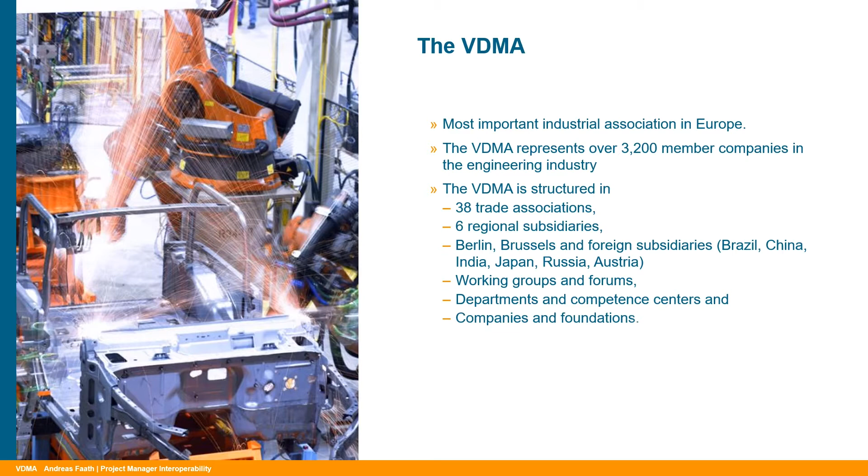Also between different branches inside mechanical engineering. Of course, we're working worldwide, so we have a bureau, an office in Brazil, we have China, we have Japan, so we are spread and representing the European markets, but also the world market everywhere internationally. So, to put it in a nutshell, the VDMA is representing the broad manufacturing industry under one umbrella.

And the mechanical engineering industry was forcing the VDMA to go for interoperability, for standards in interfaces. Because the problem we all have to face is that different interfaces are really hard to develop. It's not efficient to do different interfaces for different users and also for the different machines again and again.

So what we were looking for is a technology, an architecture, something like that, which is secure and which serves as the basis for an interoperable companion specification communication between different machines, with one language and with a kind of self-describing possibility of the machine itself.

So what we are doing really is the OPC companion specification development. That means we are not developing OPC as a technology or going deep into this technology for protocols and so on. We are really taking the technology OPC and bringing the OPC companion specification on top of that.

That means this is kind of a remote control, a universal remote control. So what you can compare is this universal remote control where we have 0 to 9, on, off, next, and reverse and something like that.

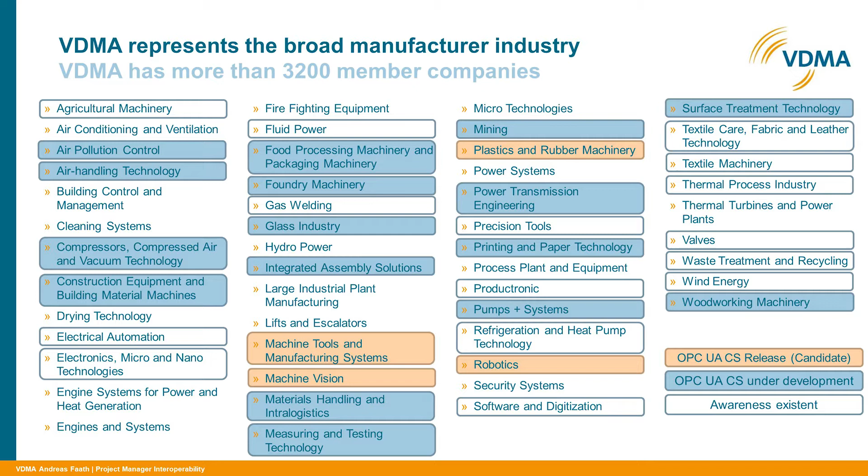What you can see here is the structure of the VDMA, and colored in blue you see all the groups which have right now companion specifications under development, and in orange you can see those who have a release or a release candidate. So what you see is that a lot of our trade associations representing the different branches are right now in the development phase of OPC companion specifications.

I will deep dive a little bit into some of them, and I cannot explain all of them, but maybe — I heard food processing machinery and packaging machinery is pretty important for the local market here.

So here the group of the Weihenstephaner Standard, maybe you heard of that, is translating exactly this existing Weihenstephaner Standard into OPC, so that the information which is standardized in this Weihenstephaner Standard is put into OPC and can be used in this technology as a companion specification.

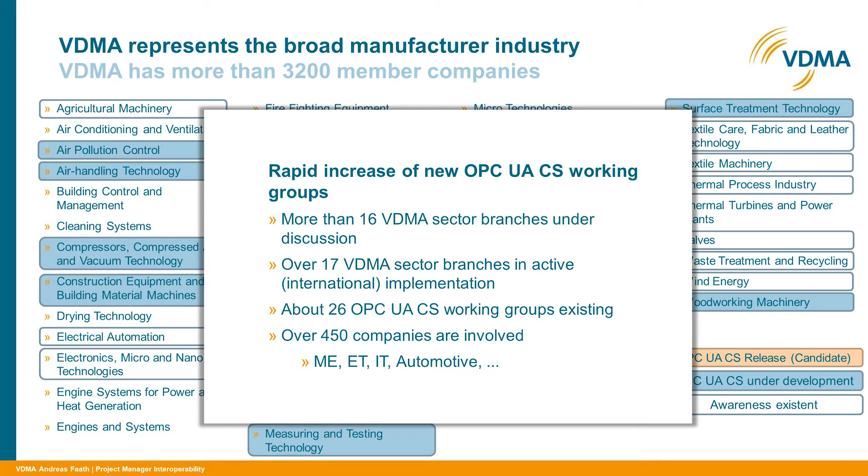Right now we have over 17 sector branches which are developing OPC companion specifications, and we have over 26 working groups. That means it's not like one sector branch has one working group — some of the branches have 2, 3, 4, 5, or even 6 working groups running in parallel or sequentially. And right now there are more than 450 companies really actively working with us in those companion specification working groups. This is really a big impact.

And this is why we have the VDMA really taken as an umbrella, a neutral ground, to bring the companies together, to let them talk about their interfaces, and to see what can be standardized and what is not that market-relevant, so that you don't have to keep it only to your own company, but share it in the group.

Those companion specifications, of course, don't fall from heaven. That means we've got a process. This process has 5 bigger parts and 2, I would say, ongoing parts in parallel. And I will explain this process using the example of the robotic working group.

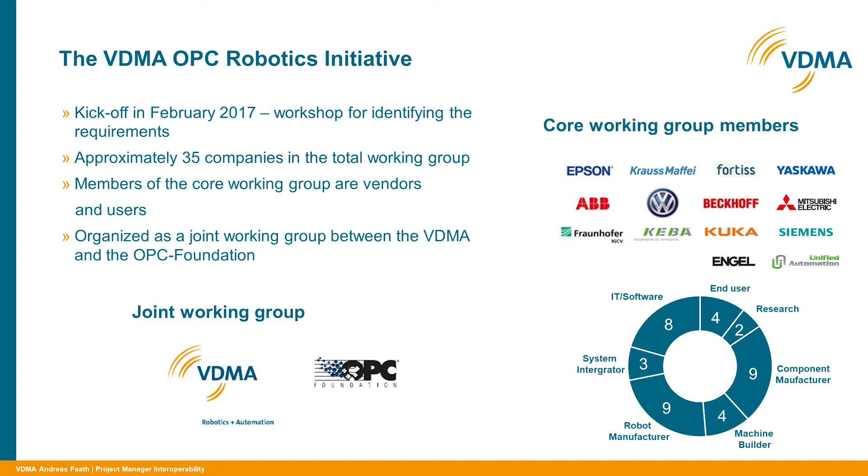So at first you see the preliminary work. That means our groups have a kickoff, they are starting, they are checking what is the need, is there a need, are there customers or users that should be integrated, and so on. So in this group, as you can see, these are the core working group members. You see here VW, for example, as one of the big users.

And as Stefan mentioned, it's also a joint working group. So in this group, of course, the domain knowledge comes from the domain experts, but a lot of OPC expertise is also coming from the OPC Foundation, and we are working closely together here.

For the content work, it's pretty important that the group thinks about their product, their machine type, and whether there's a possibility to do some abstraction. If I look in your faces, all of you have a different robot in mind. Some have 2, 3, 4, maybe 6 axes. So it's not worth doing a companion specification for one precise, detailed robot with maybe 6 axes, and maybe it's also orange. It's really important to get one abstraction level above that and think about what we all have in common.

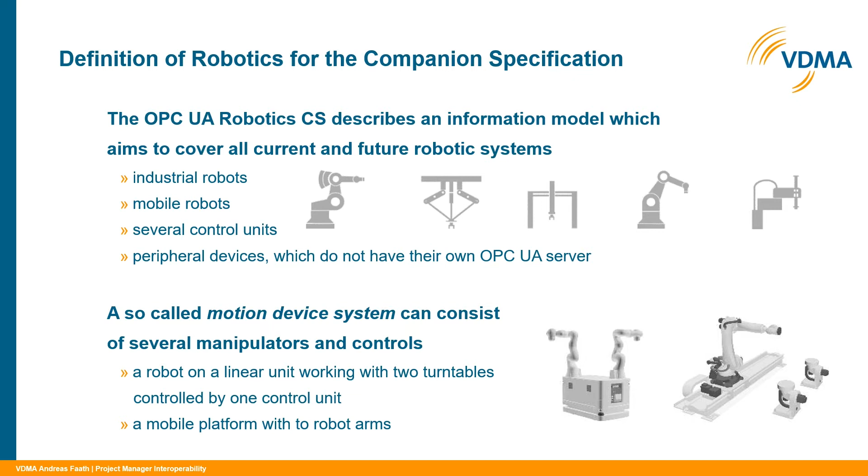So they came to the point and said we are all doing motion devices, motion device systems. They went for the goal of not a specific robot, but making an abstraction, thinking about what we all have in common, and therefore they went for this motion device system, which can consist of the robot itself, the motion device, also the status and safety states, and of course controllers.

This is directly shown in the design in OPC, where the domain experts put their knowledge, their idea of the interface, into OPC technology. So they start in this case and say there's a motion device system. This motion device system consists of a motion device or motion devices, controllers, and safety states. So the next step was to make clear what is a motion device system.

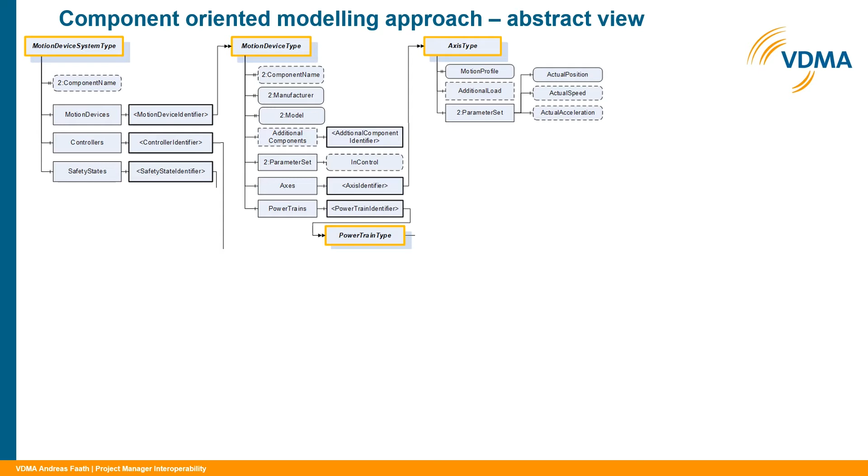And the most important things in this motion device system, of course, are axes and powertrains, because this is what makes the motion device move. Then they did an axis type where they said, okay, all the axes can be described the same way. So now you can imagine if we have 3 axes, you use this axis type 3 times. If you have 6, you would just instantiate it 6 times. So no matter what robot you had in mind, you can bring this companion specification for that.

And of course we have the motor. The powertrain consists of a motor and a gear, so they also described that. For the controller type, it's almost the same. They said, okay, we have software, we've got task controls. They put task control at a more detailed level, and they got safety states, where they have the safety state here.

And what is pretty important is everywhere you find a 2 on front here, this is derived from the DI specification. So there is a specification, I think Stefan mentioned that, which is given by the OPC Foundation, and basic information is described there, and this is taken into account and brought into this robotic specification.

And also all the variables are pub-sub capable. So you heard this morning there's client-server and also pub-sub communication, and the design was made from scratch so that it's also pub-sub capable.

Publication. We are doing these companion specifications on one hand from a VDMA Einheitsblatt and also the OPC Foundation companion specification. We know OPC Foundation has its own homepage where we can download all of that. But in addition, we also have a VDMA homepage, called opcua.vdma.org. And there you can find, on the one hand, the description of the different working groups, who they are, what they want to do, what the actual state is, and what maybe are the next steps.

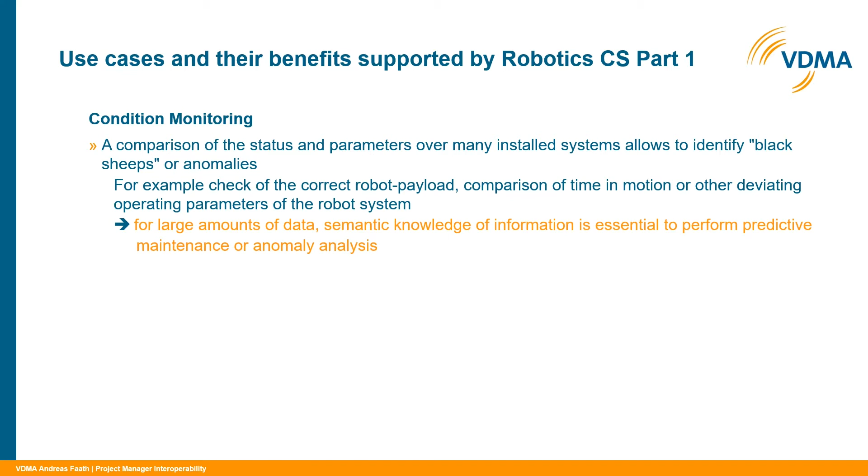One benefit is condition monitoring. I will show you later a short demonstration on that. Well, not a live demo, but they did a demonstration at the Automatica Fair last year, where they showed a lot of condition monitoring and also the topic of asset management.

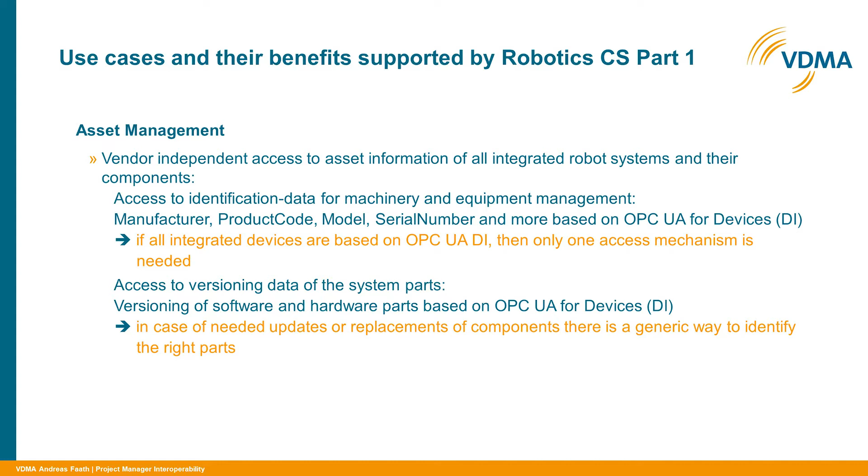So what you can see with this specification is that you have the same description of information from different vendors, the same wording, same description, same structure, same behavior. So you can just directly compare the different information from the different vendors. And this was, of course, shown in this demonstration.

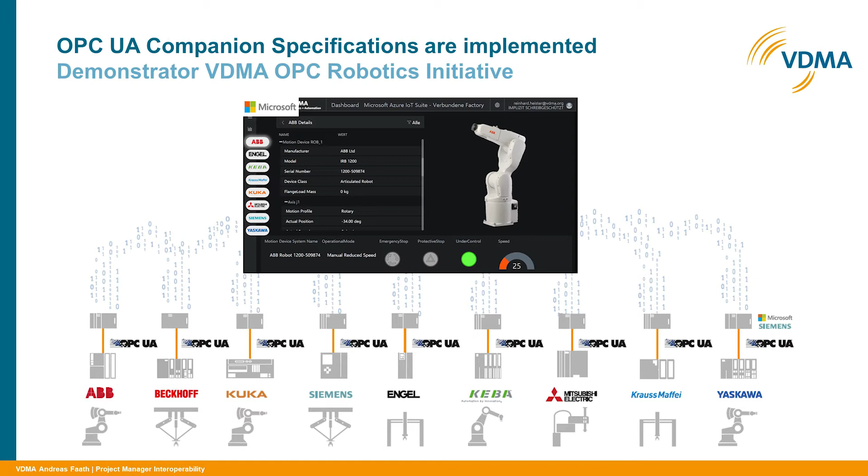They had this interface shown at Automatica last year, and you can see down here the joining companies. They had all their robots live running on the booth at the Automatica Fair, given the OPC companion specification as a draft, not the whole specification but part of it. It was all shown in this Microsoft Azure Cloud interface here. If you ask how long this took, it was about 10 to 15 minutes to bring the companion specification on the robot and into the Microsoft Azure interface shown here. So pretty fast.

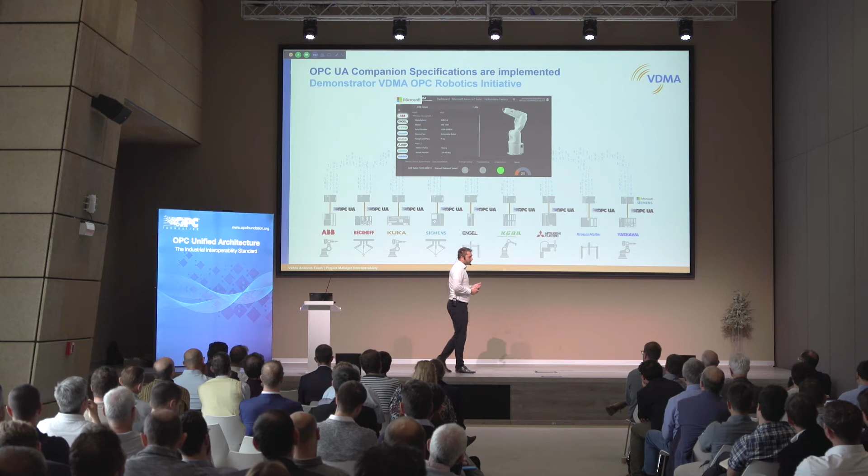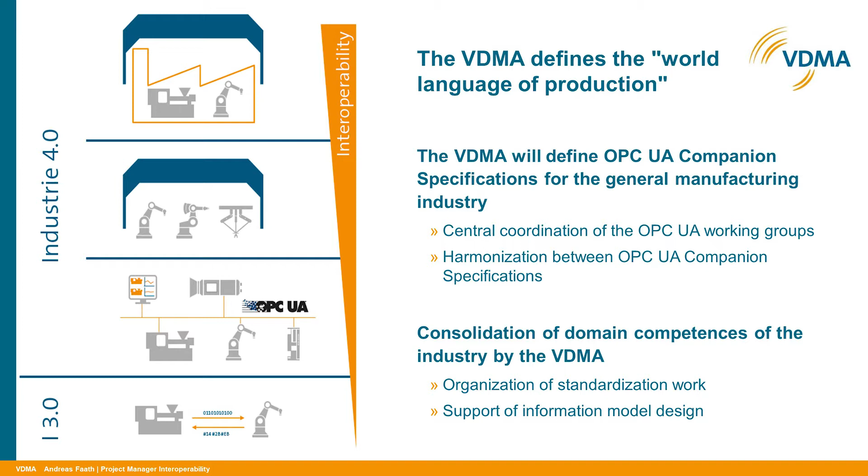This is the topic which is running all the way in parallel. Consistency is something which is pretty important for VDMA and also OPC Foundation, and we try to bring this into account from the beginning of our working groups. So we are trying to define the world production language where all the different machine types working in a production are able to communicate with each other. With one umbrella and 38 trade associations, this is exactly what we try to take into account here, to make it clear that a robot cannot have other words for the same thing as, for example, an injection molding machine.

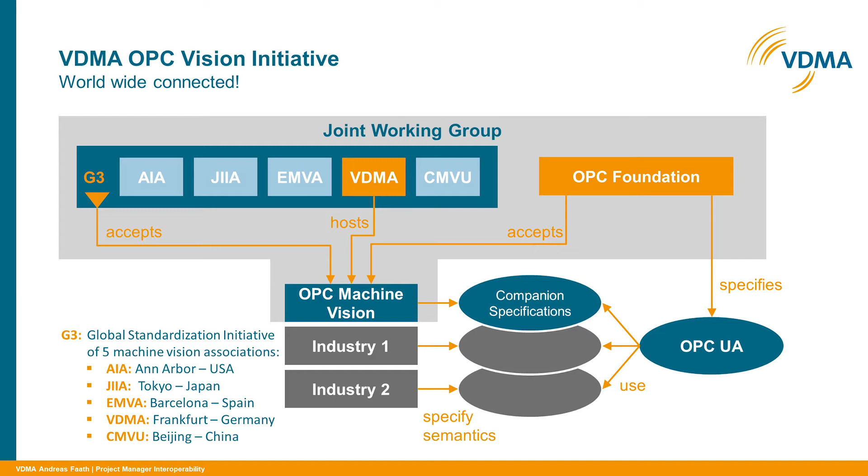For the topic of internationalization, I'll skip to the next example specification called machine vision. For machine vision, there is an organization even bigger than the VDMA, called G3. This G3 organization consists of US, Japan, Spain, Germany, and China, and of course VDMA, and they have a group under the label G3 hosting the machine vision working group. And what all the working groups are doing, even if they don't have an even bigger European sector committee or worldwide organizational part, is having joint working groups with the OPC Foundation.

OPC Foundation specifies OPC UA, and of course OPC UA uses those companion specifications. The VDMA hosts the working groups, having the domain knowledge in one room, and OPC Foundation accepts those working groups through a joint working group. So that means all our working groups are really closely collaborating with the OPC Foundation.

They have more than 60 companies with more than 100 participants in these groups, and as I said, this really started from scratch. Normally our working groups check before they start developing the companion specification who could be taken into account, where stakeholders worldwide are, who should be in this group, who should be involved. In this group you see the co-working groups and companies, and they started early 2017, released their release candidate last year also at Automatica, and had their release at the OPC Automotive Day in May at VW.

Machine vision is pretty complex. You saw the robotics, where it was important to have the components in mind, how it's built with axes, controllers, gears, motors, and things like that. For a machine vision system, it's pretty hard to think in components. It's really more a complex system driven by software. So the group had to face the problem that they cannot easily describe their machine.

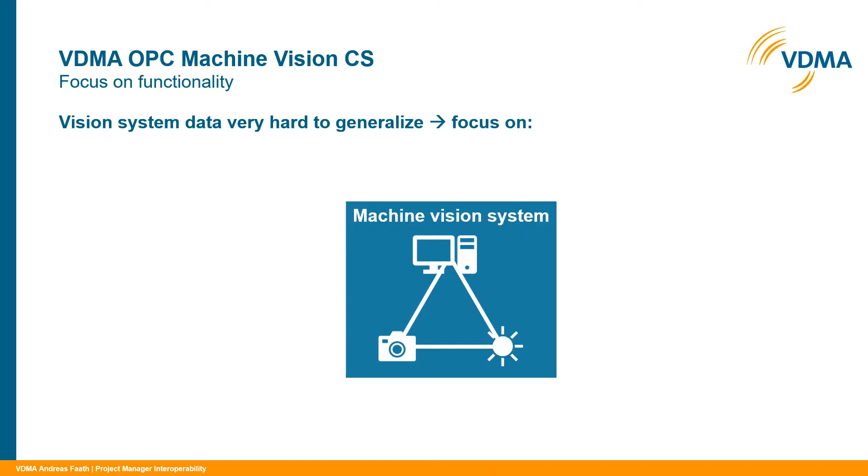So what they did was think about what they have in common, and this was the topic of behavior. They said there is configuration management, result management, and inputs and outputs. So they left the black boxes in there, but defined how data goes in and out of the system, and in addition, they all have the same behavior.

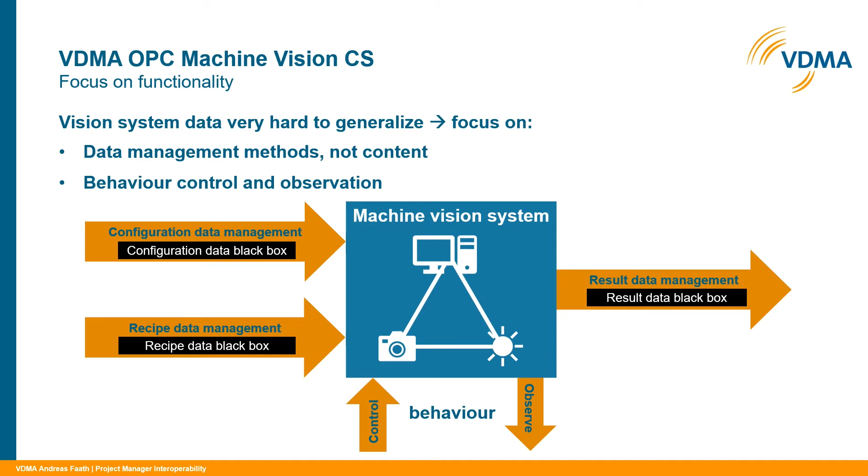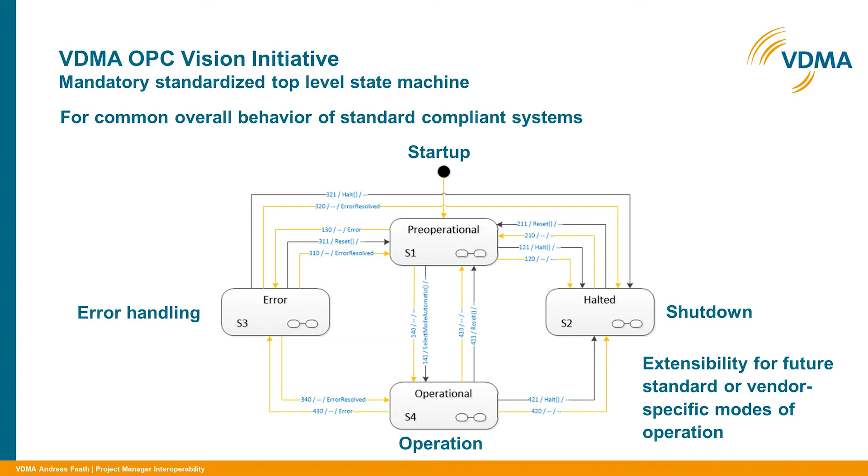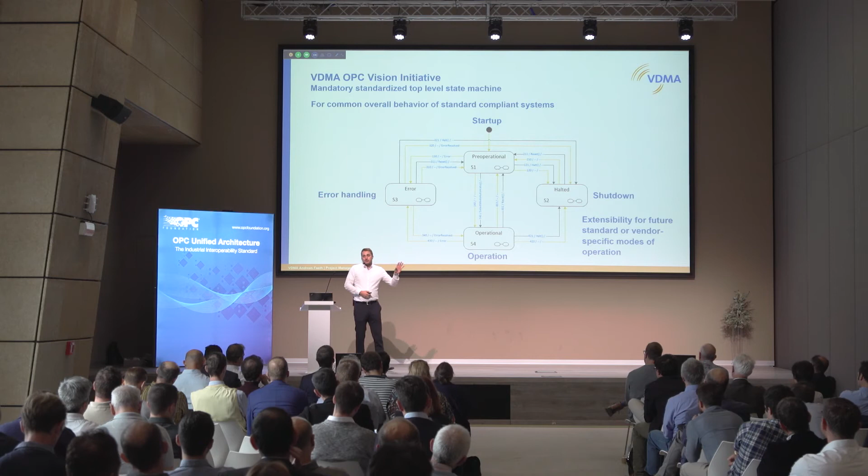For the behavior, they did a state machine. This is a top-level state machine with pre-operational, halted, error, and operational states. What you can be sure of, if you are buying a vision system with OPC companion specification on site, is that all of them have this state machine on top level. So this is a mandatory state machine — all vision systems will have exactly those states. There are even more state machines on lower levels, for example describing the error state more in detail, and those are more optional. But this first level state machine is mandatory, and you can count on your machine vision, if it has this companion specification on site, to bring you this.

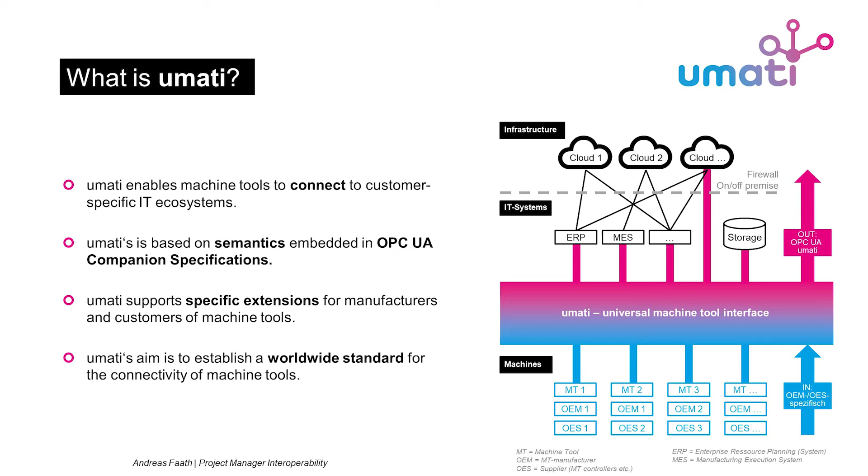UMATI is going for tooling machines — really a big activity here. They are trying to do, of course, also a companion specification, and they said our problem is that in one production, also in one line, we have tooling machines from different manufacturers, and we see that the integration and also the running of those tooling machines has a really big effort for interface development. So they said we want to have UMATI, a universal machine tool interface, which covers the most important information a tooling machine can give to the systems, to the production.

So what they did really is to have UMATI, and this UMATI has, on one hand, the basis information which is standardized, and on the other hand, there is pretty clear described how the vendor-specific extensions can be used here.

They started, and this is pretty impressive, last year around this time of year, and had their first outcoming at the AMB last year, and this was where the UMATI label, the name, the logo was first shown to the public. And it was only those companies behind that.

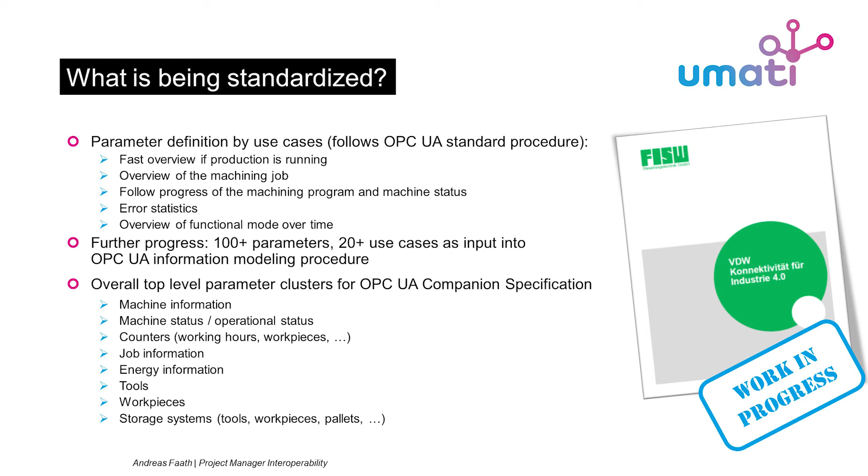So we will have an easy and fast overview of the production on the side of tooling. You will have an overview of the jobs which are running on the machines, and you will have the status, you will have statistics, for example, for errors, and of course a lot more functionalities.

And right now they have more than 100 parameters and more than 20 use cases. Some of them are really developed in detail. Some of them are still under development, roughly. But this companion specification will have a lot of parameters and will cover a lot of the use cases a tooling machine can have.

They had the first demonstration 1 year after AMB. This demo was live running at the EMO fair in Hanover last month. And as you can see here, they started with about 10 companies, and now they have over 70 companies which had a live running machine tool on their booth connected with UMATI.

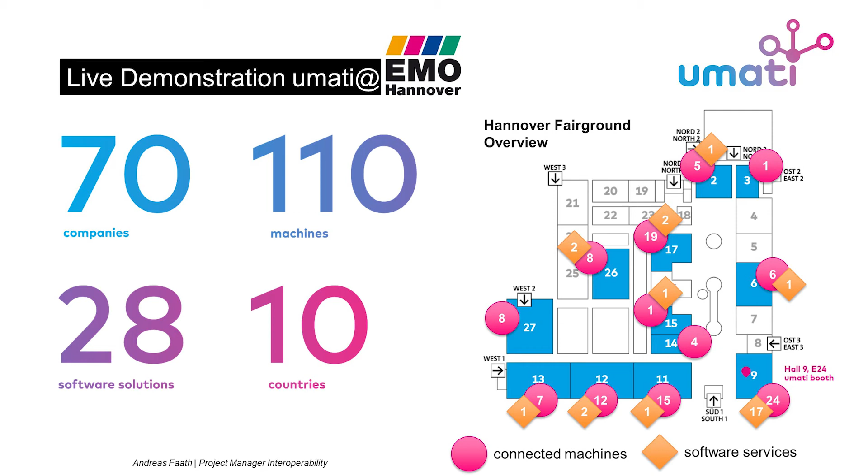So it was more than 110 companies, 110 machines of 70 companies with 28 software solutions, and the companies came from 10 different countries which had their booth at this EMO fair, and they all had the UMATI interface used. At the UMATI booth you had the big screens with the interface showing the actual states, the actual information, and everything which was implemented right now with UMATI.

And what was implemented you can see right here. Here you can see the most important use cases they are having in their companion specification.

And on the EMO demonstrator, they had the identification of the machines and different manufacturers, and they have the overview of the production running and overview of machine tool state.

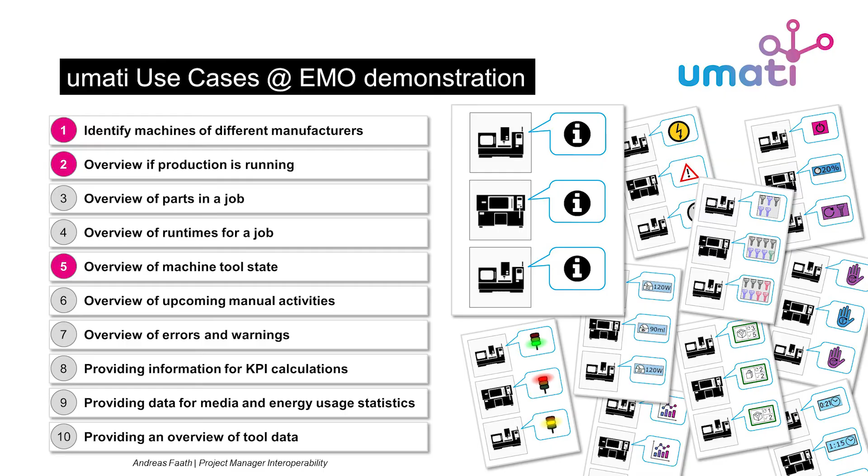So what you were able to see is the different machines from different vendors having different states, colored green, yellow, red, if it's live running, if it's right now in a pause, or if it has an error, or even if there's no color, it's just switched off. So you're directly able to see the performance of the different machine tools running on the different booths.

So it was pretty interesting for me, for example, that there were some machine tools just running the whole night. Nobody's on the fair, but the tools are running. And some of them had the whole night in error. Some of them were just switched off. This is something you can imagine to have in your shifts, in your production.

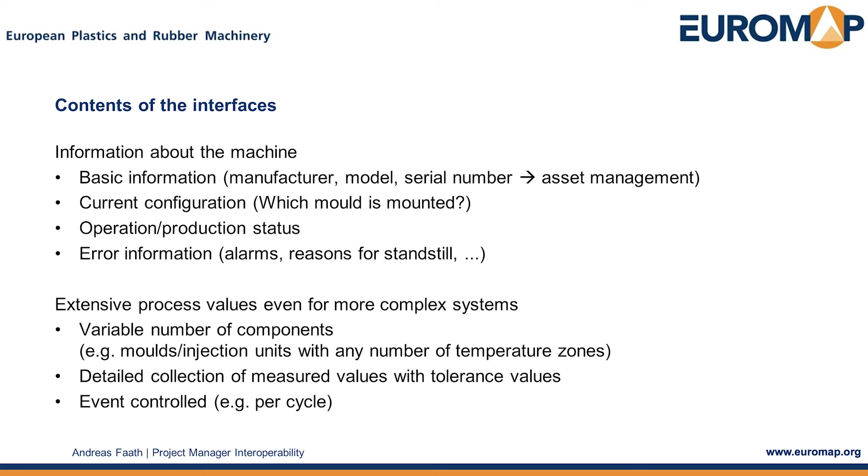And what they are doing, and what they did also, this is one of the first comers and they have some specifications released already, is that you will have basic information, you will have the configuration of the machines, you will have, again like in UMATI, different states and of course error information. So this is one of the most important basic information you get delivered by the Euromap specifications.

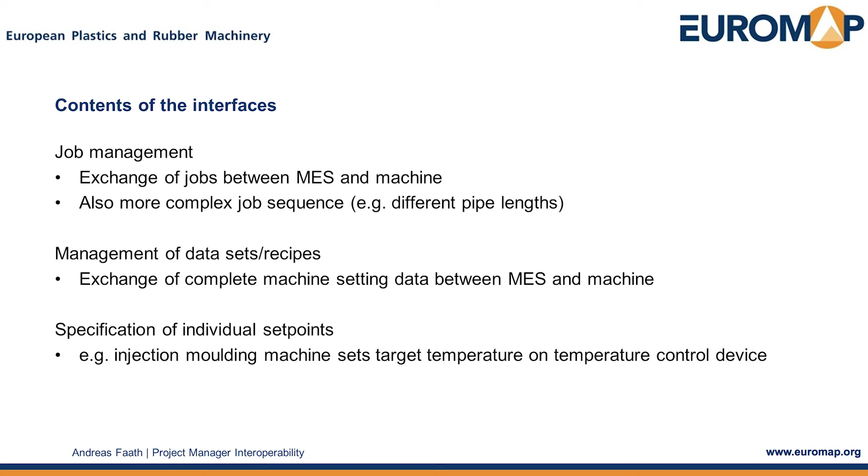And again, they have use cases: job management, management of recipes, or for example the specification of individual set points. So it is not like we have just a flat list of different information or variables. It's really about structuring, about thinking about the use cases, how this information will be used, and then describing the whole use case in one specification.

And not like you have 20% of this one use case, 30% of a different use case, and maybe 70% of a third use case, but a use case is fulfilled completely in one specification or in some specifications. So it's critically important for all the groups to bring a kind of benefit to the user, and this is always somehow given by use cases.

They have one specification which is kind of the mother specification, it's the Euromap 83. And this Euromap 83 is describing on the highest level plastic and rubber machineries. So you will find there no specific information, for example, of an injection molding machine. It's really more about manufacturer ID,

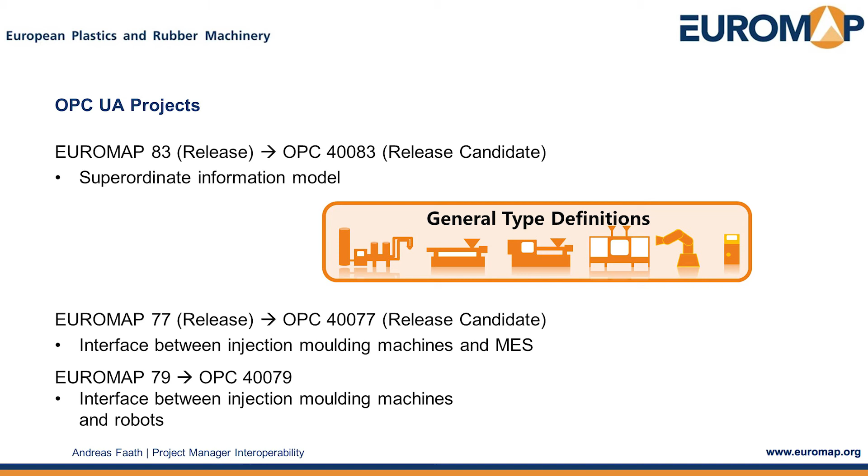temperature zones, and so on. What they did is then have one layer down of that, and all of the other specifications are deriving from that Euromap 83. They have different more specifications, for example 77, which is for injection molding machine to MES communication. Or they have 79, which is for communication with injection molding machines and the robot. So here you can see it's also in the name of the specification.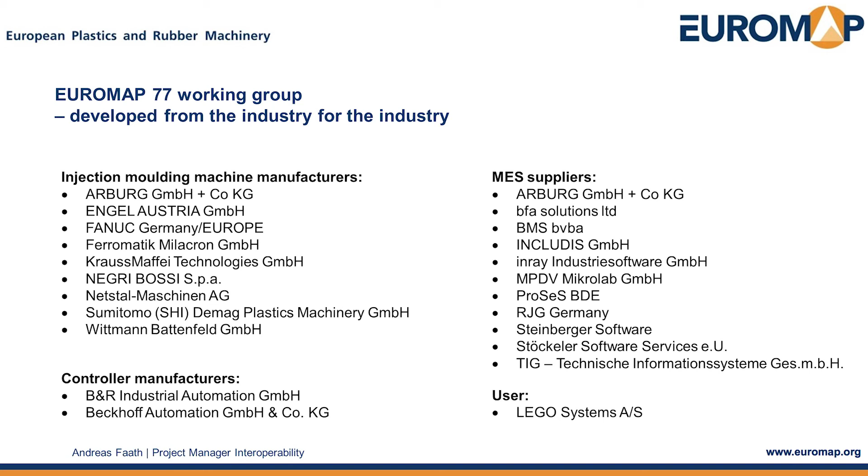There's a use case where the communication partners are described. In Euromap 77, it's pretty nice to see how this group was set. So there was one trigger, this was Lego Systems. Lego Systems really came to the VDMA and to the group and told them: we're having so many injection molding machines and MES system is so important for us. We need somehow an interface, a standardization. It makes us crazy not to have here a standard in the interfaces.

And in parallel, this group of injection molding machine manufacturers came together and said, yes, of course, we have the same problem, not for the integration, but for the development. A user is not asking for our machine one interface. We have, for the same user, several different interfaces, and it costs us a lot of money.

So the injection molding machine manufacturers came together and were able to really have a companion specification working group. And as you can see, this is Euromap 77, so injection molding to MES. They also have MES suppliers inside. So they took some MES suppliers and also have the other side of the communication in this working group, and also the controller manufacturers who have to somehow make it possible to use the companion specification in the real production.

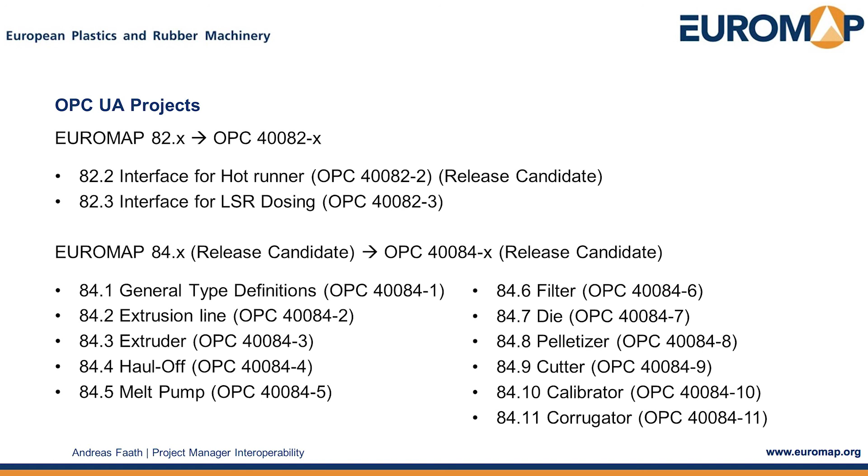I will not explain all of the parts here, but what is interesting for you is that we have the Euromaps 82.x, so there are really a lot of parts coming, and this is always for peripheral devices. So it's, as you see here, it's for hot runners, it's for LSR dosing systems, and there are more peripheral devices coming which will be covered in this series of the 82.

And they have the 84 line, which is more for the extruders, where they have also a lot of different specifications for extruders: Haul-off, melt pump, die, cutter. So also a lot of peripheral devices which are somehow described.

So as you see here, a lot of release candidates. So all the 84s are the release candidates, so in the phase of commentation. That means they will be released, I would say in the next 2 or 3 months they will be available as a release, also under the OPC Foundation companion specification site.

And what is also important, and what we are forcing our groups to do, is plugfests. So what we don't want is to do only paperwork. It's not worth spending 1 or 2 years developing such a specification and then bringing out a product which is just paper, which is not implemented, which is not tested. So our working groups are doing demonstrators, are doing plugfests, are somehow checking the quality.

And yeah, of course, it works for them. So they had, I think, 3 two-day plugfests where they really were debugging a lot. So it's not that easy to do a high quality specification without any plugfests. So they came with their controllers and with their software inside to the VDMA, and they have their switches and try to communicate, to exchange information using the specifications. And yeah, it works.